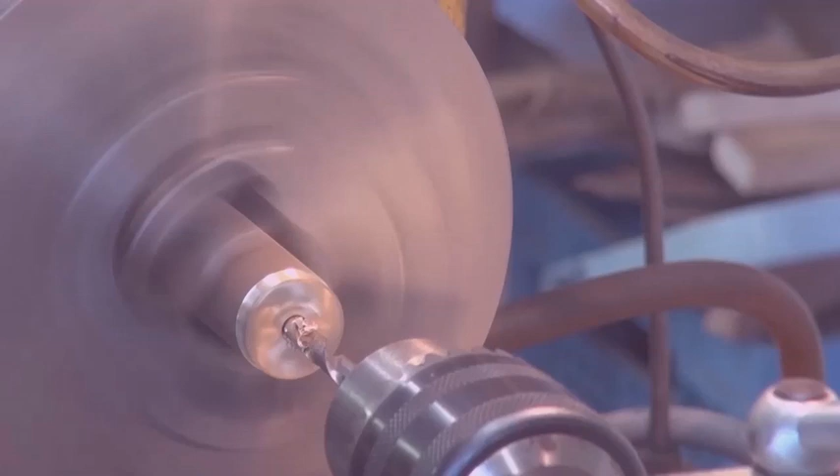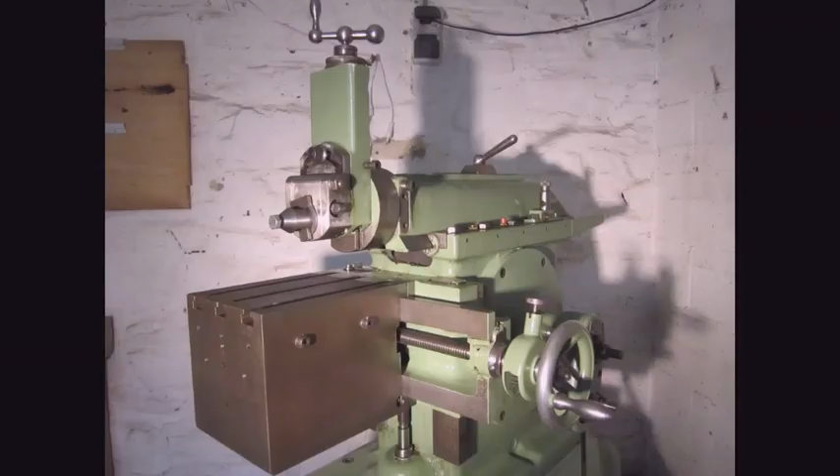This is part 2, the final part of copying a gear for my lathe. In the first part we saw the setup and I had to stop, but now we will continue. Let's see what happens, see if it works.

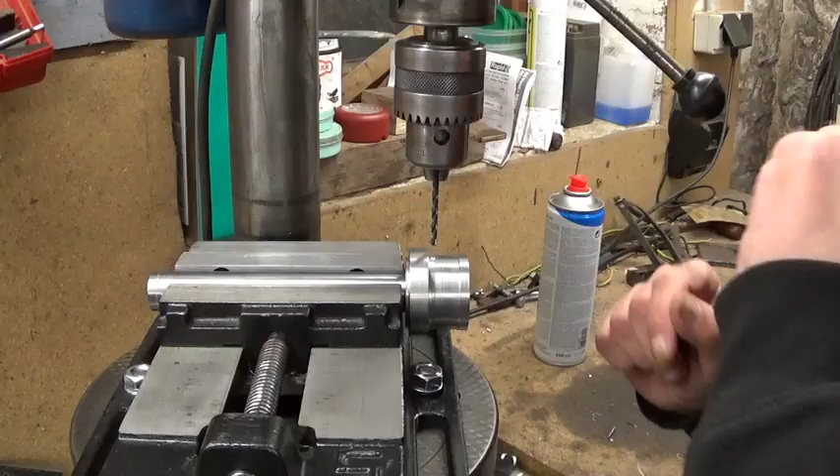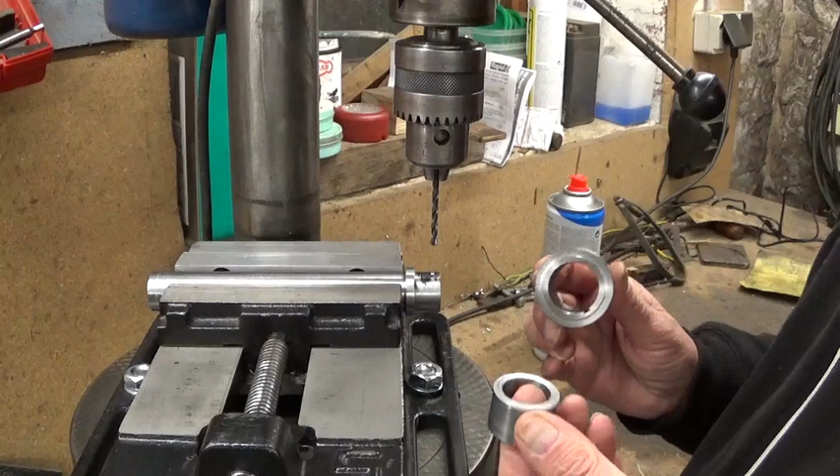To put the set screw in here, I have to drill, and this is gonna be a little bit scary. This piece doesn't hold in place and it's in two parts. I already put a center drill here in the center of the shaft. The vise is fixed on the table, so normally that shouldn't be a problem. This one goes here, this one goes here, and I hope it will be self-centering. Let's try and see what happens.

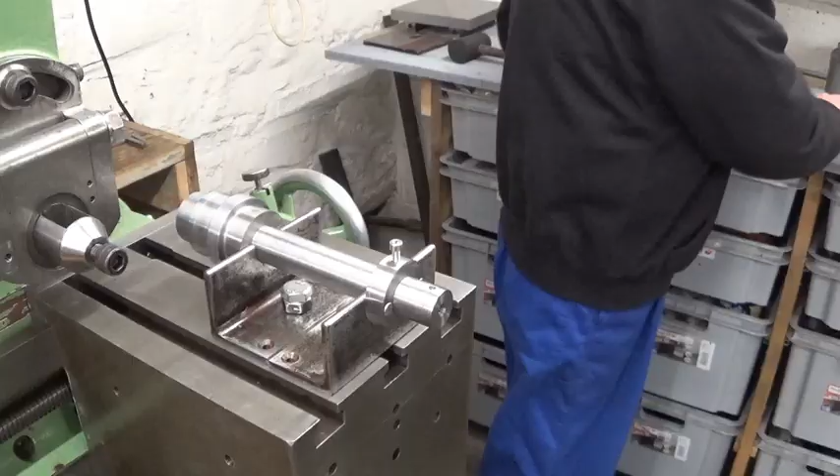I think that worked just fine. Let's tap it. This is the original gear, and inside is the bushing I made. I drilled and tapped here, M4, and here's a little dimple. So this one comes here.

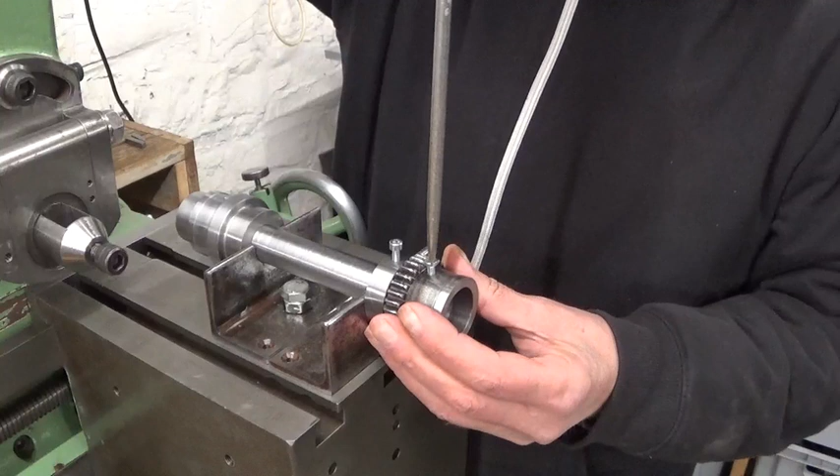That seems to work. Great.

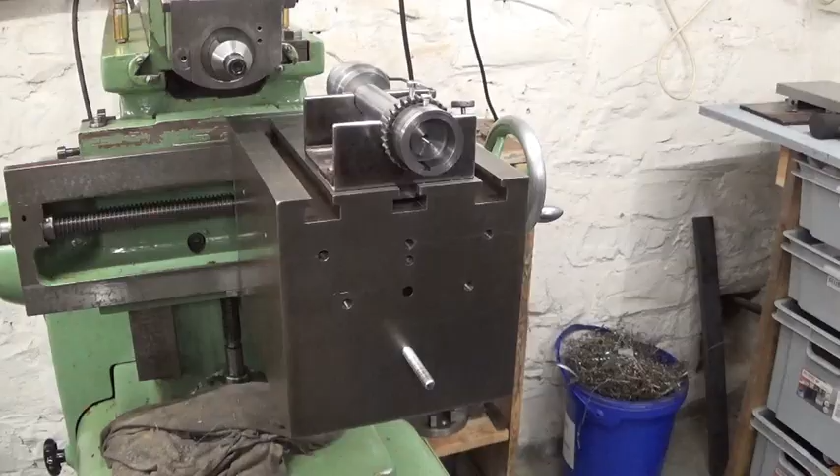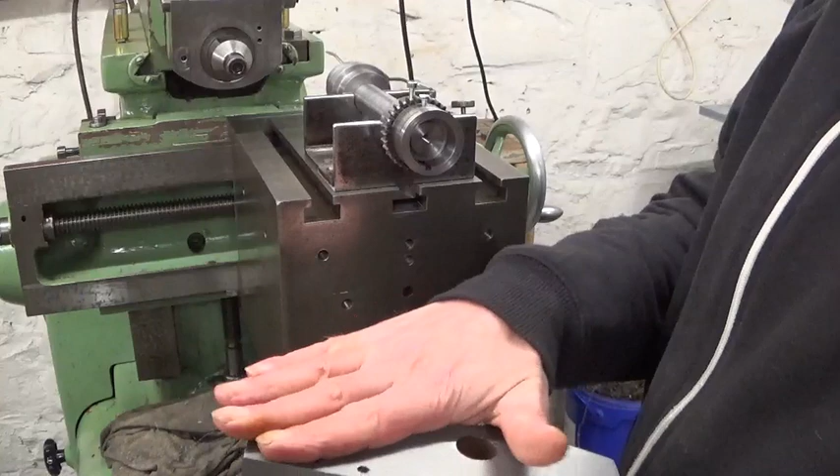That will do. Now to lock the system here, I came up with a scrap metal system. This must be the piece of scrap most used in my shop. As you see, this side is machined, this side is not, but it's not important. And I drilled a hole in here. I will show you how it works.

This one comes right here. A nice big washer and a nut. And then I made this pin.

This will go, of course, here in the teeth of the gear, and we hold it in place with a washer and a spring that goes in here. It's a bit too tight... like this.

Try to center it. That looks good. To be sure it's not gonna move, I'm gonna add this clamp. That's the idea.

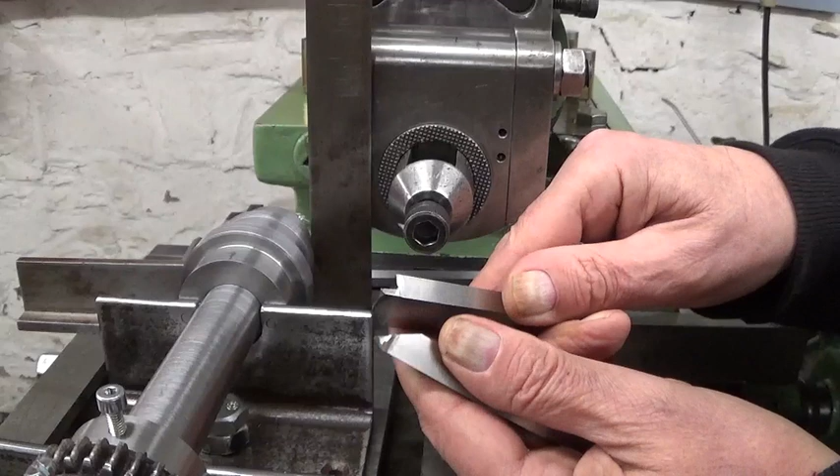I also prepared two cutting tools. First I'm gonna cut with the small one, cut completely to depth, and then I made this one, which should normally have the right size for the teeth to do the finishing passes. First, this one. That will do.

I suppose this is the kind of setup you don't see every day, but we'll see if it works. Now, I measured all the gears in my lathe, and they're all different depth for the teeth. So I took more or less an average, and the depth of cut will be 3.2 millimeters. Okay, here we go.

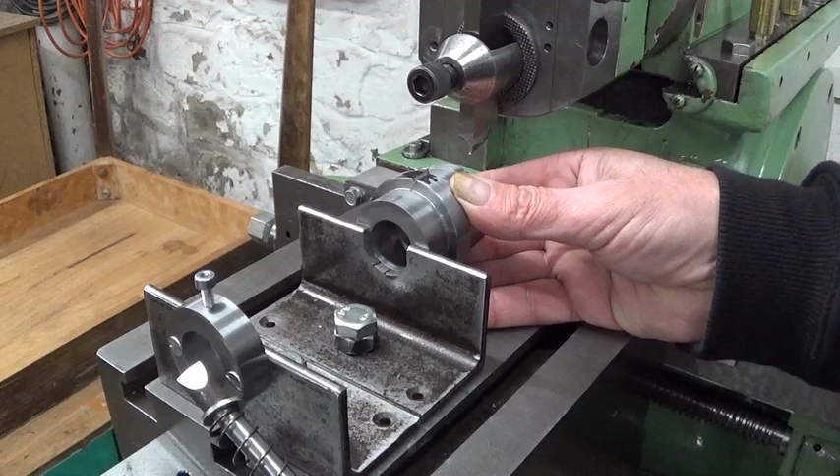So let's reassemble the thing and see if it works. It doesn't work.

We can see clearly that this L-shaped iron piece here is bending while cutting. So this is not rigid enough. I have to make a more solid setup.

So I took the whole setup apart again. I'm gonna reuse this one, it works very well, no problem. So this one comes here, and then I found a bigger plate. I'm gonna adapt it to fix it here, and then I have a little piece of flat bar that I can bolt on here, and then on the lathe I will drill and bore it out on the same height, same center height, than this one, of course.

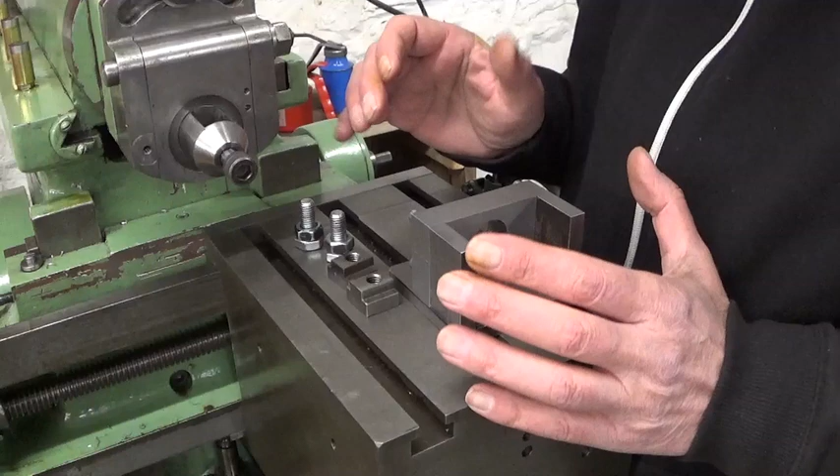So let's mount the thing and see what happens. This time I hold it with 2 T-nuts, the other one was with only 1. So for the rigidity, normally it should be better. It's a bit snug. Okay, that looks good.

The tool is centered over the work, so now I can put my table stops in place.

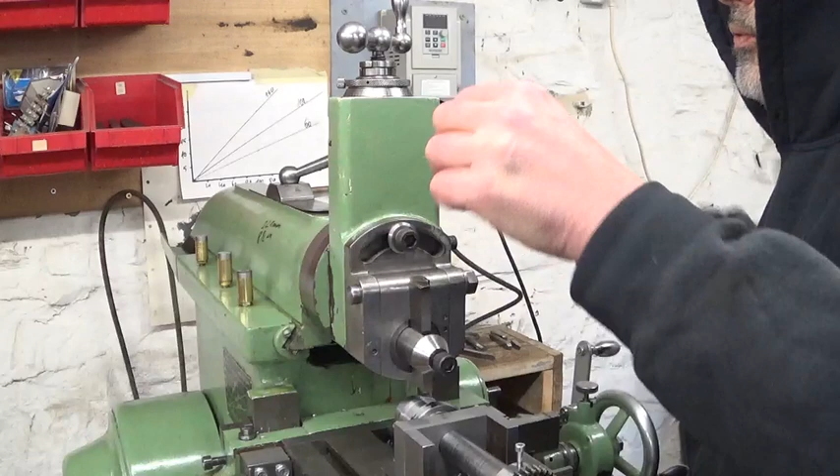Touch off, put zero. Right, I'm all set up to take the first cut of the second try. Let's see what happens. Here goes nothing, as they say.

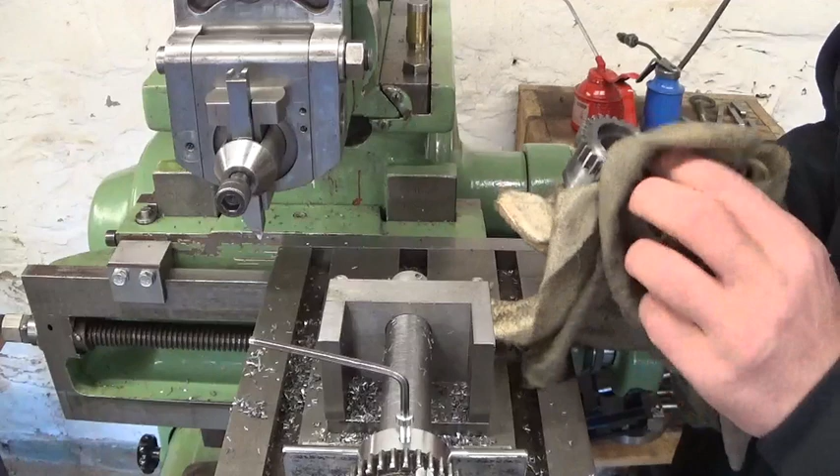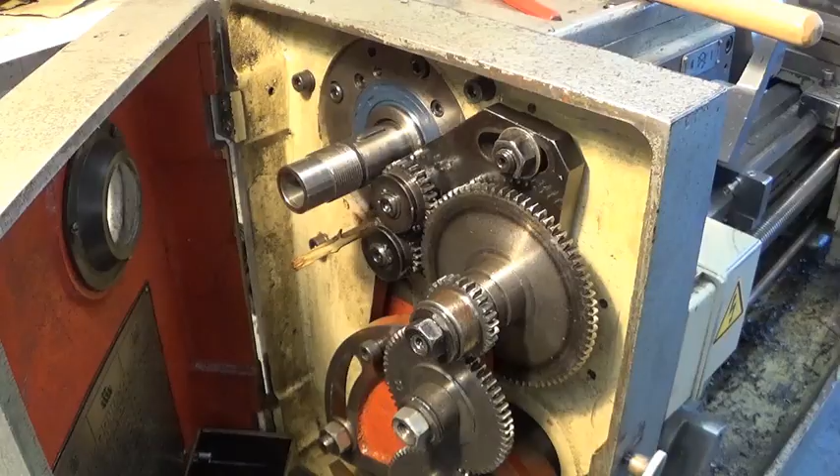I'm gonna deburr a bit and then see if it works. But to me, it looks like a gear. First of all, we're gonna see if it fits.

That looks good. Now in the comment section, Tom suggested to do a sound test, compare the new gear and the old gear. So first I'm gonna put in the old gear, turn the lathe, and then we're gonna listen. And then I'm gonna put in the new gear and turn the lathe again, so we can compare. I think that's a brilliant idea.

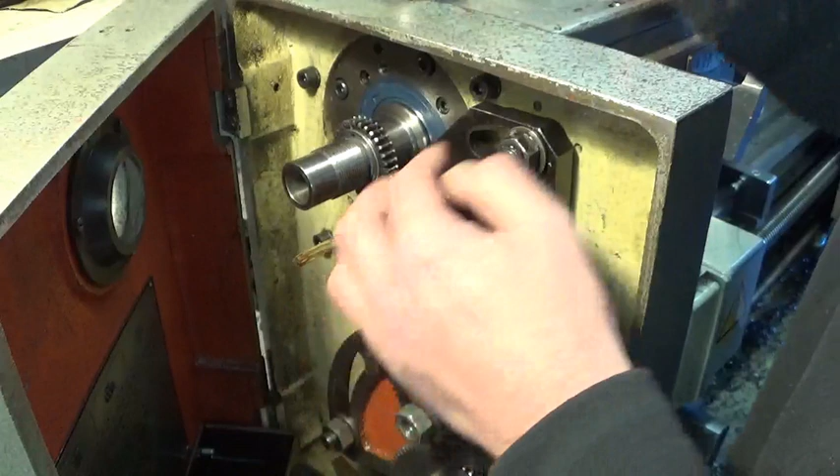Right. This system you see here is the reverse system. On a normal lathe you have a handle somewhere to switch. Here you have to unloosen this nut and then change and re-tighten. Stupid system, but it is what it is. Okay, let's give it a spin.

Now I'm gonna mount the new gear on it so we can compare. Let's compare.

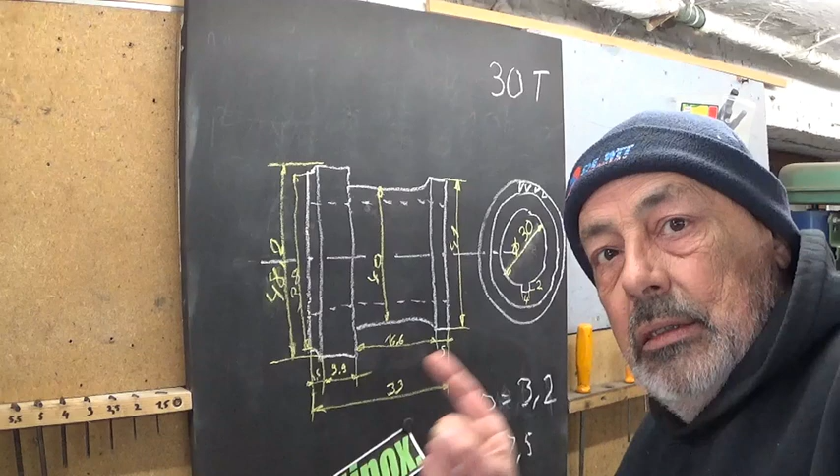The old gear is a bit less noisy. I don't know if the camera picks it up very well, but the new one, you feel that indeed it's new. But the reason why my setup was not rigid enough is easy to understand. I'm gonna take this away a bit. Voila.

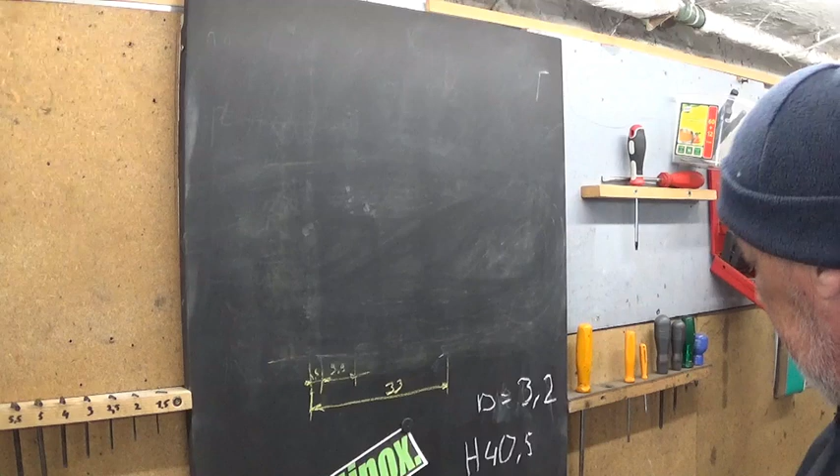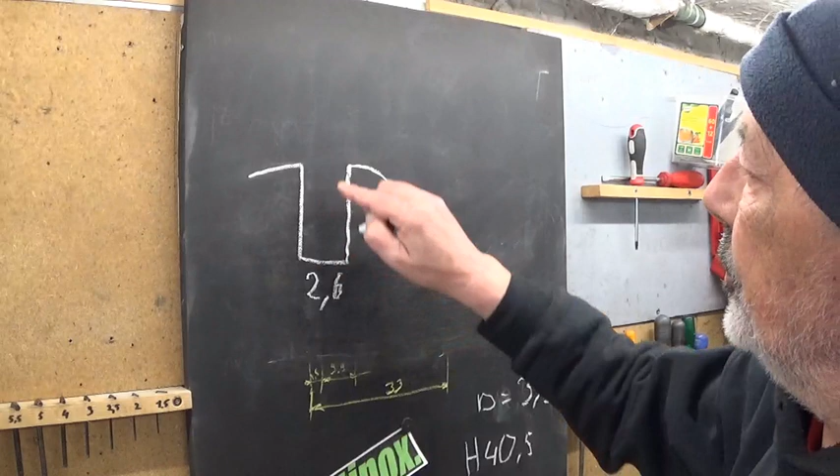When I made this one, the Ratchet gear for the shaper, the teeth are straight, with a width of, if I remember well, 2.6 millimeters. And the cutting tool is going down, and the cut is always 2.6 millimeters. That's a small cut. So my system with the angle iron and then this ring here worked perfectly well, no problem.

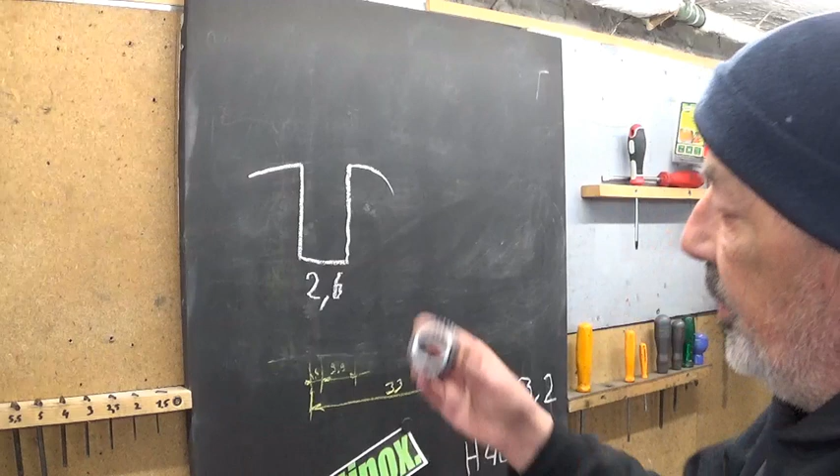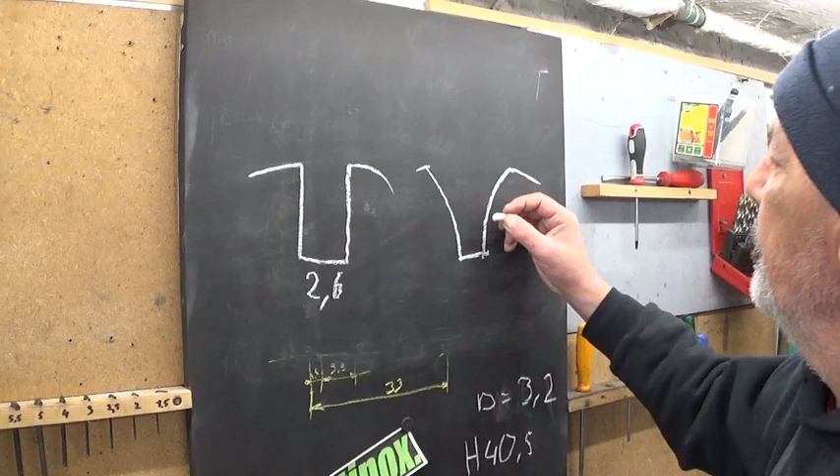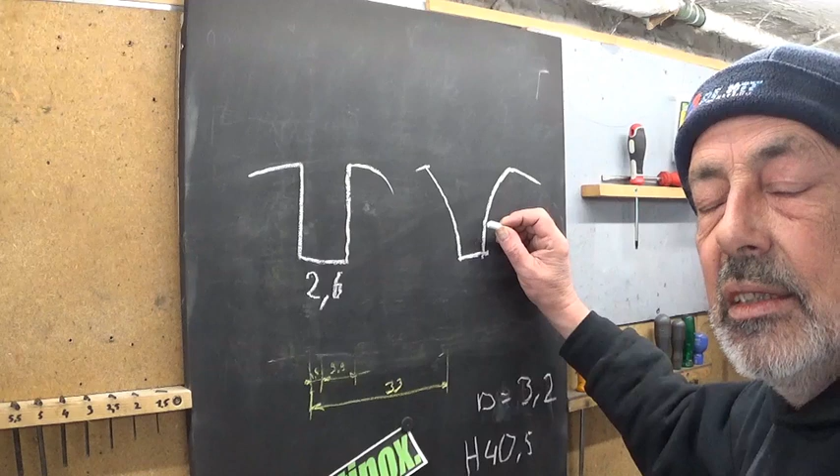When I made this one, the teeth are in V and a little bit rounded, more this shape. Of course, when you're at full depth, you cut all the surface, and the depth was 3.2 millimeters. So here the width of the cut is in total more than 6 millimeters, almost 7 millimeters. And for a little machine as mine, that is a big cut.

I think we can conclude that copying gears on the shaper, indeed, it is possible. My biggest problem was precision, of course, because this gear is completely worn, and then you have to take measurements on something that doesn't exist anymore. That's not really easy. And then a mistake I made was this bushing system to reuse the old shaft. That's not a real good idea. I should have made a bigger shaft that goes in here, and then bored my angle block out bigger, so it will be one rigid system.

But it works, and there's more good news. My hair is coming back. It's not the original color, but it's coming back.